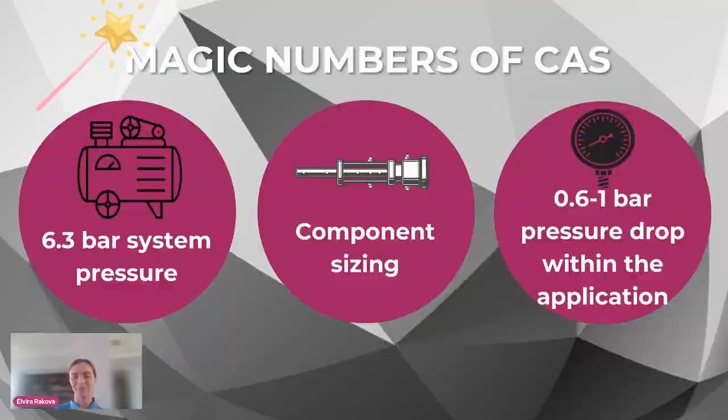Just to refresh a little bit the basics of compressed air: when we talk about, for example, 6 bar of compressed air, it means we take one volume of 1 cubic meter and put there 6 times, 6 cubic meters. So this is 6 bar compressed air. We always work there with volumes and with pressure. Why does this magic number matter? Why does this 6 bar matter? Why does the sizing of components matter, or the pressure drop?

Because this actually creates the part of the energy consumption, your energy bill that you pay, and also the system performance. Our energy consumption depends on the pressure level that we supply to the system, plus the pressure drops that occur in the system, even if we have a perfect system, times the filling volume. Filling volume is all the volumes that we need to fill: the geometry of the cylinder, for example, all the dead volumes we have, the flow in the application where we need the flows, all the tubing, and so on. So this is basically our system performance. We always work with pressure and with filling volumes.

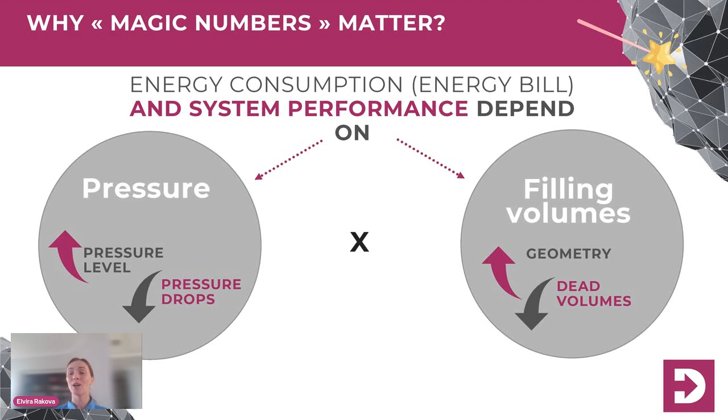Since we don't work with temperatures there and we have a standard temperature, we likely ignore this factor in our energy consumption consideration. However, it has some impact, but not a big one.

So the first magic number I would like to discuss and unveil today is the pressure level of the system, 6.3 bar. I put a magic ball here for a reason, because I always asked myself why it is 6.3 bar. While working in the lab, every time I turned the pressure regulator to 6.3 bar, I was waiting for something to happen. It's everywhere, written 6.3 - not 6, not 7, not 6.5. There is something mysterious in 6.3 bar.

So how did I start my journey to look for the technical explanation? First, I did a questionnaire of maintenance managers and also suppliers of equipment, suppliers of compressors, and auditors, and everyone confirmed this is the best practice, this is our baseline, and this is the standard. Whenever a system worked under 7 or 8 bar, everyone would say we need to reduce it to 6.3 bar at the machine.

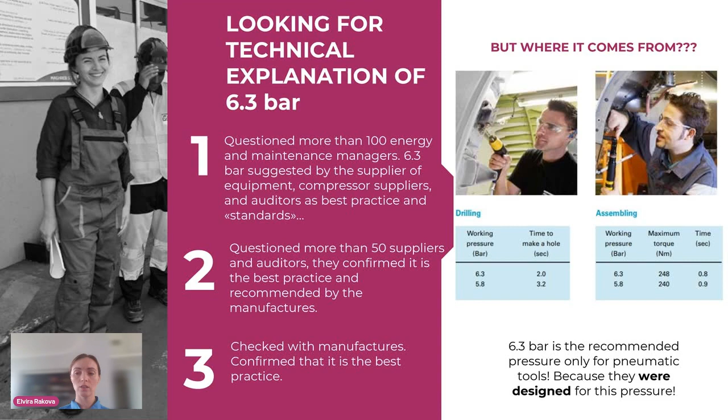So my next question was why those systems were actually designed for 6.3 bar. I'm waiting for the next slide to show you on the screen. Here it is, and here is another interesting historical background: 6.3 bar is 90 psi, because we use the SI system.

In the US, they would use 90 psi. 90 psi was chosen because it's a technically reasonable pressure that a compressor could supply, plus it's a pretty number - I've been told it's a pretty number. If you translate this pretty number into bars, it's 6.3 bar. This 6.3 bar was adopted in all countries, because this standard for those tools was first developed in the US, and then adopted elsewhere. I mean, agree, it's a nice number, right? Like 90, not too high, not too low - a very nice, pretty number.

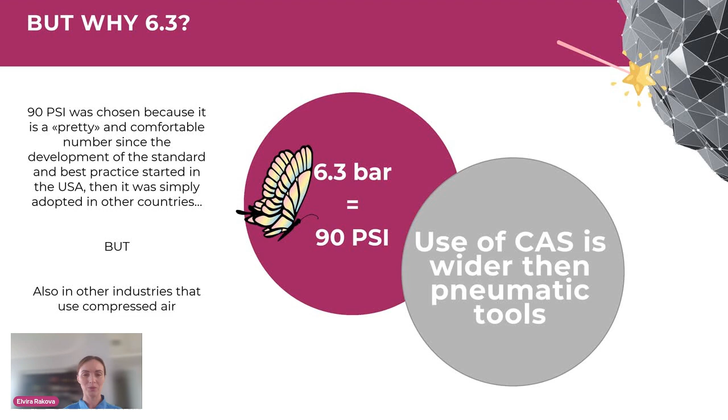So moreover, they were adopted not only in other countries, but also in other industries. It means that for pneumatic tools, only for a few applications, this pressure level and standard, and this technical explanation, was also adopted in other industries.

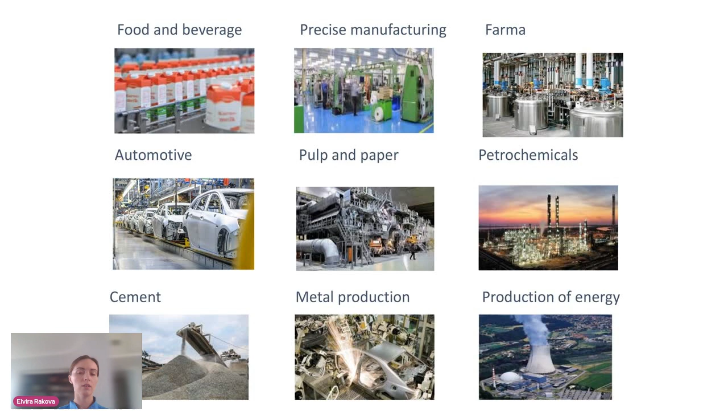But pneumatics, compressed air, is more than just drilling and checking machine tools. We use pneumatics in compressed air in food and beverage industry, precise manufacturing, pharmaceuticals, automotive, pulp and paper, petrochemicals, cement industry, metal production, production of energy. I don't have all the applications here, but you probably know better than me. We also have woodworking machines and various industries where we widely use compressed air, not only to drill holes with pneumatic tools. And these applications of compressed air can technically be divided into four types of application.

So the first type is, of course, the working air that we use in automation. For each application we have a certain equipment. So we have automation, we have painting applications for explosive areas. This is what we call the working air, and there we have certain tools, certain equipment and components. We also use it as active air for material transport and also for the bearings.

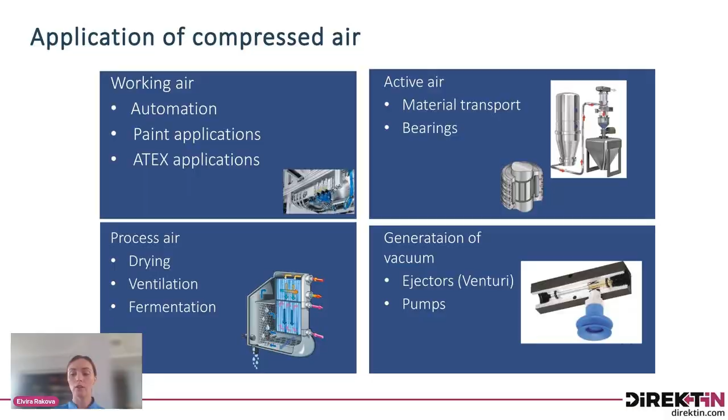In the process air, for example in cement, in the chemical industry, for drying, for ventilation, for fermentation, and we also use it in the vacuum. So we can use it as ejectors, or we can use it as vacuum pumps.

So here we are actually beyond those drilling and assembling requirements or standards that were developed and adopted so many years ago. And if we go a little bit backwards and question ourselves: do we actually need 6.3 bar at all for our application? Do we need this pressure level? Do we need pressure at all? Or maybe we need a high flow there? These are the questions I would like today to discuss with you.

And to show you that there are standard ways to optimize compressed air systems nowadays. However, we need to follow better practices, and we need to follow just a new thinking of the design of compressed air systems, as well as more efficient technology.

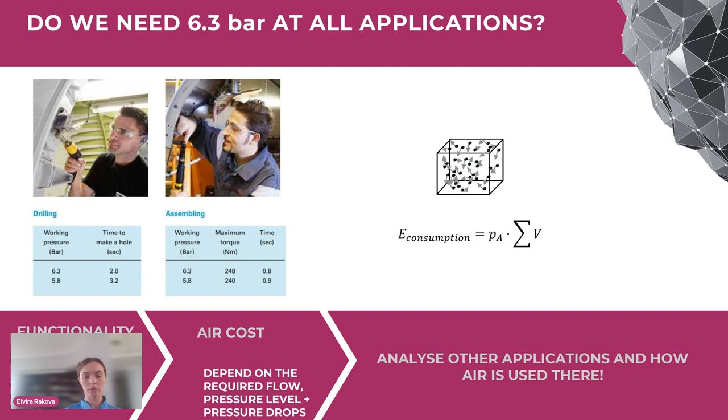So let's think together. We have the application of 6.3 bar for assembling, but what if we follow the same logic and go to all other applications that we have? And we see, do we actually need those pressure levels, or what do we actually need for our compressed air system there? So let's go ahead and see how air is used beyond those applications.

Today I would like to focus just on a few applications. So this is mostly used in the working air - basically the first type of application that I showed you, and also the vacuum. But today let's talk about the first step, the working air. In the working air, we have a few things.

So we need to perform transformation of pneumatic energy into mechanical energy of moving mass. So basically it's the cylinder. We have air somewhere, we push the piston, and then we have something moving, or we perform the force, or we use it in the press application. This is one of the most standard applications of compressed air, right? Standard pneumatics. How else can we use it?

We can use it for blowing. So basically we use this pneumatic energy as the kinetic energy of the flow for cleaning or blowing applications, for transport, a lot of things. Basically it's also used in chemical, in cement production, in various things. So there we need the flow. And another thing is that we use those pneumatic energies.

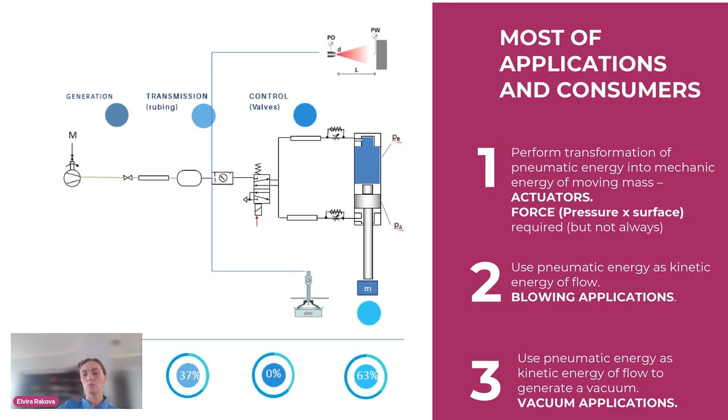So the question is, do we actually need technically those 6 bar at each consumer? Can we adapt it, and why does it matter? Now you see that there are practices that have been used in the past, and well, now we don't have to apply the same practices for those tools where a certain torque is required. Here we need a certain force. And this magic number, it also matters on all levels and on all applications.

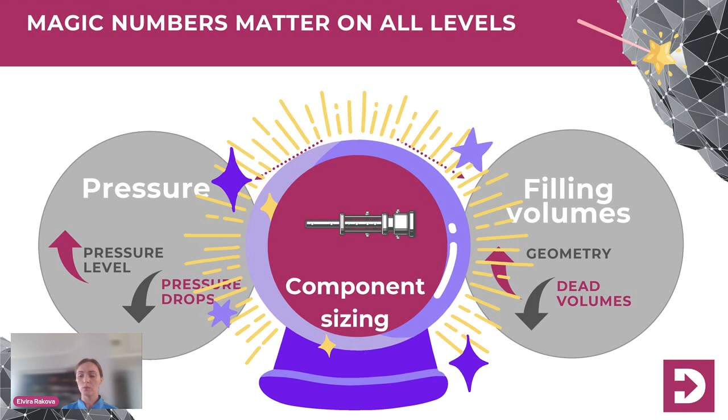First of all, of course, it's important if we see the pressure level contributes to energy consumption, as well as pressure drops, filling of the geometry and the dead volumes. It all comes to the fact that we need to size our components correctly. This, for example, we can see on the example of the cylinder. There are 3 steps for how to choose a cylinder, 3 standard steps. First of all, the choice of the cylinder starts with the identification of required task parameters, right? So we have the machine, for example a press machine.

We have a pneumatic press there. We need to understand the force that we require for this application, the velocity, and positioning. There are other dynamic factors, acceleration maybe. There are a few things that are important, but the most important is usually force and velocity.

Then we calculate the required cylinder diameter under standard system pressure. You see here on the right-hand side, this is the catalog of the manufacturer, and from every manufacturer you can find it, and it's standardized. You see this pressure for determining piston force, 6.3 bar. So it means it was calculated and tested by the manufacturer at this pressure. This is again our magic number here.

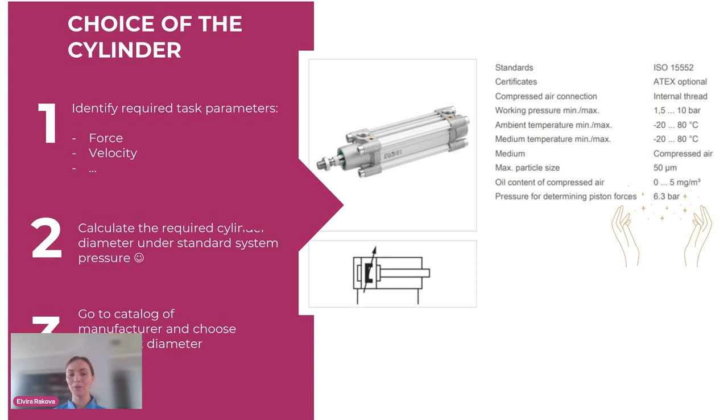Then we need to go to the catalog of the supplier. For example, if we chose to calculate a cylinder diameter of 26 millimeters that would be required for this task, then we need to choose cylinder 32 from our standard catalog. And since we assume right now that we cannot reduce this pressure, the pressure is set standard because the supplier told us this calculation was done under 6.3 bar, we cannot choose cylinder only under these circumstances, under these conditions.

Let's see what about the consumption, how the consumption will change there. First of all, here is the comparison of cylinders with diameter 50 millimeters, 32, and 25 millimeters. If we follow a very simple calculation of pressure and volume, you can see that the cylinder with a diameter of 32 millimeters consumes only 41% of a cylinder of 50 millimeters.

And this is a very common case in standard pneumatics. The common case, of course not the consumption itself, but in standard pneumatics it's very common when we oversize a cylinder. So for example, we chose the 32, but then, okay, maybe we need more safety there, and bigger is safer, probably, or faster. But this just gives the feeling that it can save the application.

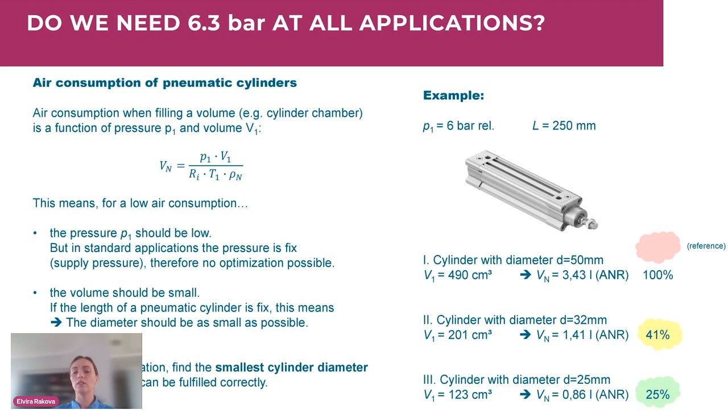You understand the logic. We're increasing volume here, and we cannot decrease the pressure level here, because this is the standard thing. It has always been done like this, and this practice of pressure level was adopted. So it means that to reduce energy consumption, we need to size these cylinders correctly, we need to calculate properly, not oversize it, and we always need to pay attention to this.

I want to show you now the standard cylinder sizing and this sizing dilemma, basically. You see here the numbers that are standardized nowadays. We have here, I didn't show the smaller ones, but we have from 32 to 125, and then we have a certain gap: 40, 50, 63, 80, 100, 125.

Each of these, the piston force and the 6.3 bar, contributes to or creates the extracting force. So we have retracting and extracting force, and this is usually the criteria how the machine designer, machine builder, or system supplier chooses the cylinder. As I said before, I calculated 49, I choose 50, okay? But look at this gap between the force values, the gap is actually huge.

So between 50 and 63 millimeters, it's 1,200 Newton. The next one is 1,900. The next one is 3,000. And another one is already 5,000. Another one is already 8,000.

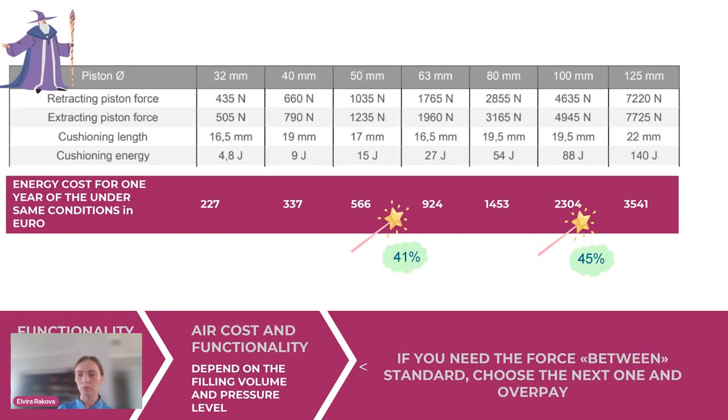And the problem is that standard pneumatics was actually not designed to be efficient, because this gap doesn't make sense, it doesn't make any technical sense. It should be the opposite: it should be a bigger gap in the smaller diameters and a smaller gap in the bigger diameters. But where are those numbers coming from?

In the 1800s, the French engineer Charles Renard created the Renard number system. This is the geometric progression that was adopted by the International Standardization Organization for various industries, including pneumatics. You can find it in electronics, in chemistry, in many industries.

It's a very good initiative, right? Because we need to have standardized sizing. We have to have standards to be able to communicate information to customers, to be able to optimize. I mean, it is essential and very important.

However, it was also applied for the cylinder bore size. And if you just multiply the current bore size by 1.259, you get the next cylinder size. So good news, you don't have to remember this anymore. What is the standard cylinder size? You simply just multiply it.

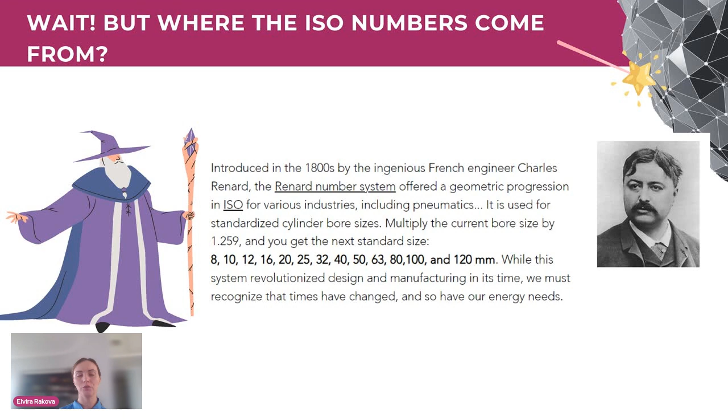But the system was adopted in the 19th century. And of course, it helped and revolutionized the design and manufacturing of that time. However, I think nowadays, for the 21st century and for 2023, it's a little bit old, and we are under pressure of energy efficient solutions. The question is how we can provide energy efficient solutions when we still use this. We have this standard of the standard cylinders, and we cannot change it because it's already best practice.

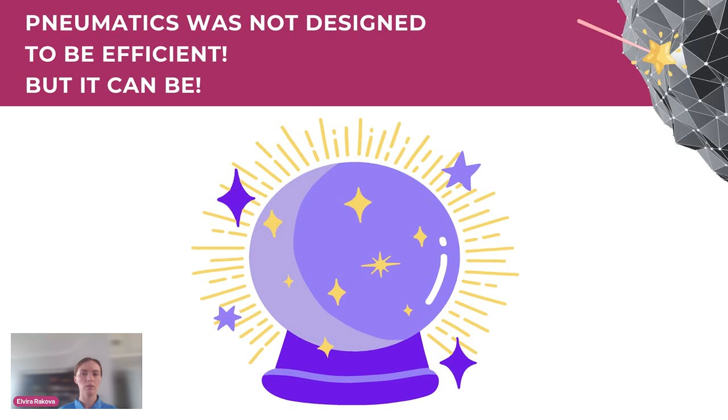And I think that pneumatic systems can be efficient, and I'm sure about this. It's not only my opinion, but the opinion of various manufacturers, system suppliers, and also machine builders, that nowadays there are slowly coming to market best practices for optimizing and reducing the consumption of the application. So once again, I remind you, and I will always remind you, we have pressure and filling volumes.

So we can reduce pressure level. Yes, we can reduce pressure level at the compressor, and we can size the cylinder according to the pressure level that you have. It doesn't have to be 6.3 bar. As you could see, you could choose a bigger cylinder under the lower pressure level.

You can also reduce the pressure drops. It doesn't have to be half a bar or 1 bar - that's too much. And if you hear from manufacturers that pressure fluctuation of 1 bar is fine, that's not right. Physically you always have pressure drops, but not as high as this one.

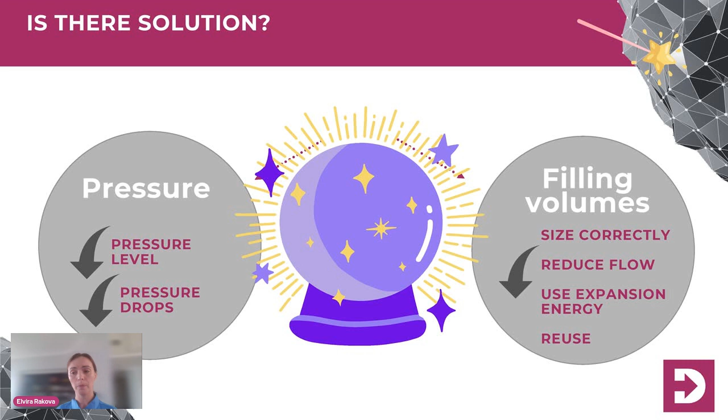And of course, the filling volumes - so you can use them correctly. You can size it correctly. You can reduce the flow. You can reduce, for example, also the dead volumes. So when we always play with these two things, we always need to find a balance for our functionality, for our application, and the pressure level, and also the flow.

And here, just one of the things that was developed by the Artema organization - I'm using a table from them about various energy saving measures at the levels of actuators, distribution valves, distribution lines, and also filter regulators. On purpose here, as you see, I don't touch the compressor because we're not talking about generation. We're talking about how the air is used.

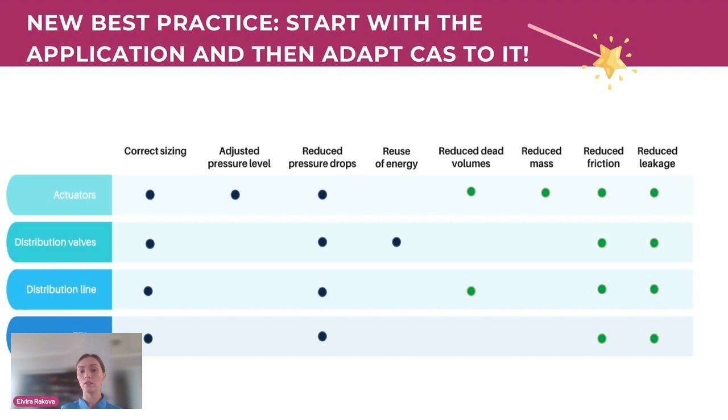My main idea is to show that first we need to start from the application. So we need to reduce the consumption of the application and ask ourselves why I have this pressure level. Do I need this pressure level here? Do I need this cylinder actuator? Do I actually need this technology? Maybe it's not a pneumatic cylinder that has to be used there, but maybe it's an electric actuator. There are various factors that have to be considered.

Today, I wouldn't like to go into the details about cylinder sizing, but you can find those tutorials on our YouTube channel, No Boring Pneumatics. So I hope you can have some interesting insights there and learn more about new technologies that are already available on the market.

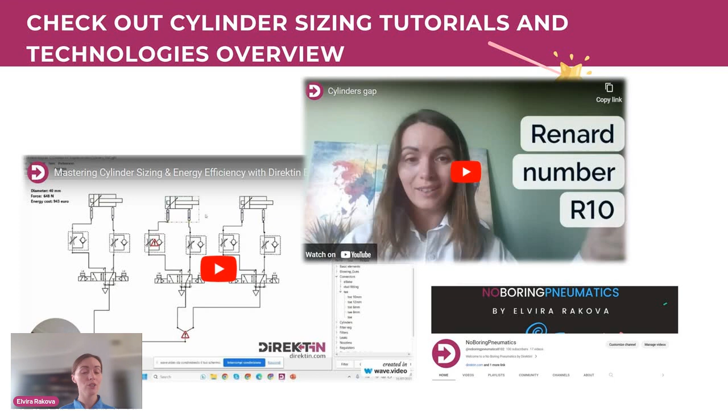And what I wanted to tell you is that there are various technologies that provide, for example, the cutting of the volume, the use of expansion energy of compressed air inside the cylinder. It can also reuse the energy. It can also reduce the pressure for the return stroke. So it's not only this old sizing with the Renard number available nowadays on the market. There are various technologies that can be implemented nowadays, and they work totally fine.

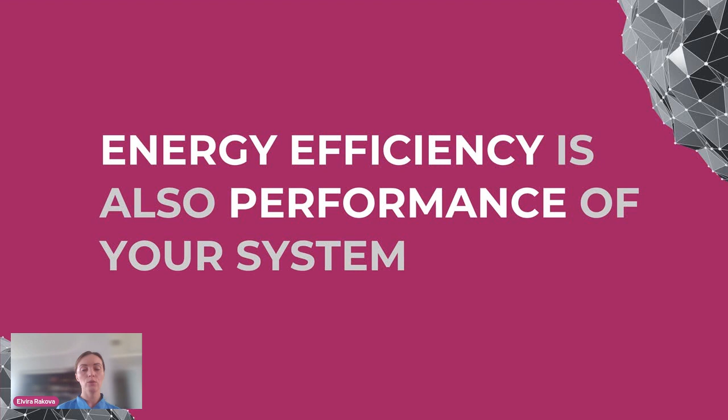Another thing that is very important is that energy efficiency is also performance of your system. What does that mean? It doesn't mean it's always a balance, where either my system is faster and better or more energy efficient, or it consumes more or less but loses performance. In pneumatics, it doesn't work like this.

Energy efficiency in pneumatics, in compressed air, is always the result of a correctly sized system. It's very simple: if your system is sized correctly, if there are no problems in the application - you have enough force in the cylinder, enough blow force, enough speed, and no leak problems inside the cylinder seal - I'm going into details now, but this is important to remember. It is always the result.

Another thing I want to talk about, the third magic number, is the pressure drop within the application. It's considered that 1 bar pressure fluctuation is fine. In my opinion we need to reconsider this - and also in the opinion of physics, thermodynamics, and real best practice in the industrial sector, it's a very high pressure drop within the application, within the machine. I'd like to share a real use case to show how optimizing the application first is very important.

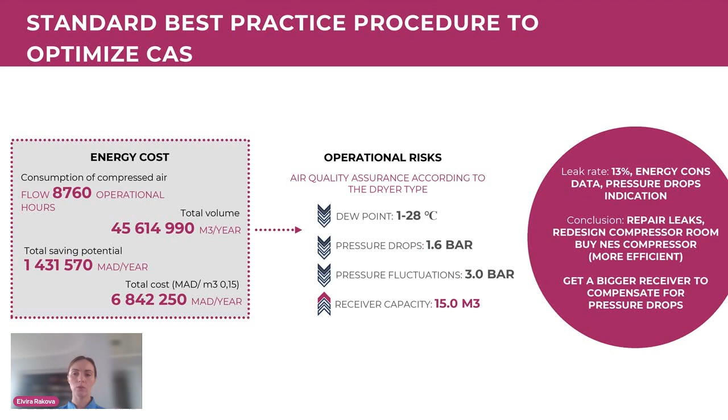And there were some leaks and so on. Of course, when we look only in the closed box of the compressed air system without the application, we reach one conclusion: we need to repair leaks, redesign the compressor room, buy a more efficient compressor, maybe compensate those pressure drops - or rather not have them at all - maybe we need a big receiver.

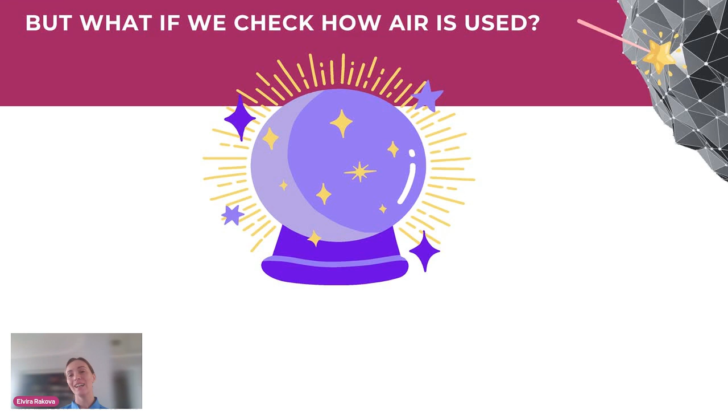So that's the information we got from the previous audit. Because I think compressed air is fascinating and very interesting, I'll use my magic tricks today in the slides - we asked our magic ball about the application. So what is the application, how is air actually used, and what are the magic numbers of this application - why does it cause such a high pressure drop, and what is this?

In this factory, the client replaced old technology with air knives - basically using a flow application. Before, I showed you we can have cylinders, vacuum, or flow applications. In this case, it was a flow application to clean the surface.

So we modeled the projected application - just the application, because they changed it. The most important thing for the customer was the blow-in force and the consumption, the flow rate in cubic meters per hour. So these were the requirements, how the air was used: it had to provide a blow-in force of 120 Newton with 700 cubic meters per hour.

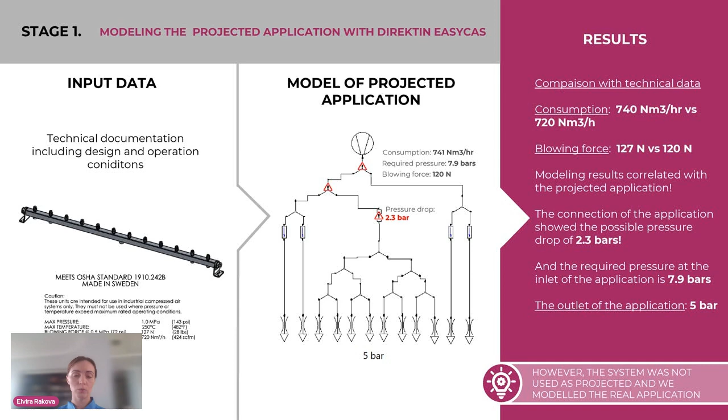So we saw our model correlated with the technical standards, though there were some little flaws in this application because one piece was changed, another wasn't, and so on. There was a pressure drop within the application, a pressure fluctuation of 2.3 bar. Of course, this was not normal, and the customer was not satisfied. If we calculate back, the required pressure of the compressor was not the magic number of 7 bar.

However, the system didn't actually work with this blowing force and this pressure, because we saw on the manometer the flow was very low - sometimes okay, sometimes not. So we saw this wasn't the real application. When we calculated and modeled the real application, we saw that the required outlet pressure was 2.2 bar, and the actual blowing force during operation was 70 Newton instead of the projected value. The consumption, of course, was lower.

And the required pressure was 3 bar with a drop of 0.8 bar.

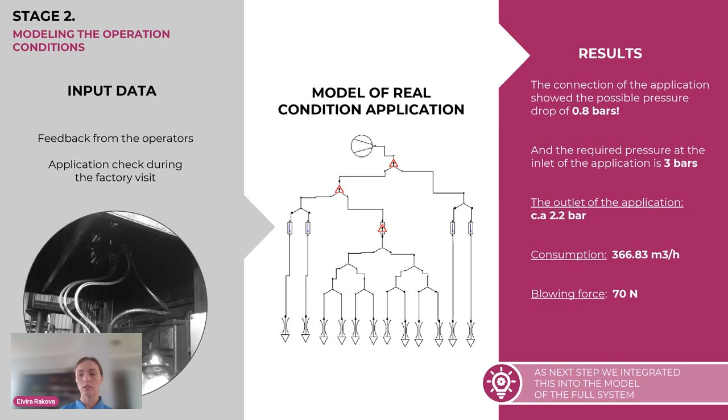The next step is to take this application. After understanding what the application does and what the process actually requires, we always need to take the full holistic picture and insert this application into the compressed air system, understanding how everything works together, how everything correlates.

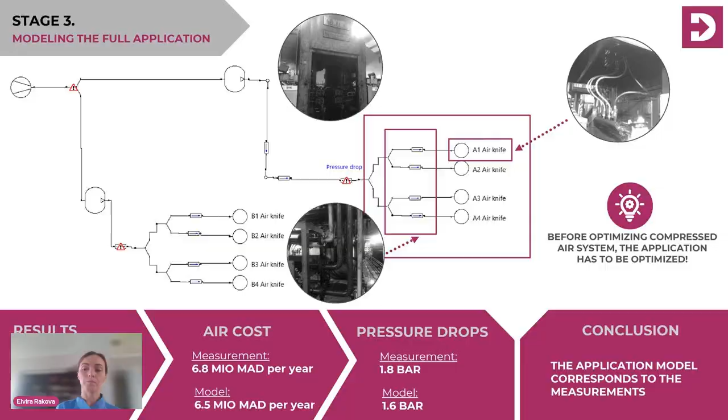So the results were following. It's true, the measurement confirmed that this was the situation on those air knives: the pressure was low and the flow rate was also lower than projected. The air cost more or less the same, and the pressure drop was around 1.6 to 1.8 bar. So the application model corresponded, but of course...

customer wanted to have a more efficient component, more efficient application with a higher blowing force and also better performance of the system. And here comes the question: was the compressed air system actually ready for this integration?

Because in our head, we have the machine and we have the pipe, and somewhere we have the compressor, maybe 2 kilometers away or 1 kilometer away from this room. And it looks like a very simple system that should work and adapt to this application. However, it's not like this. It's a very complex system with various components, with various things that should be considered.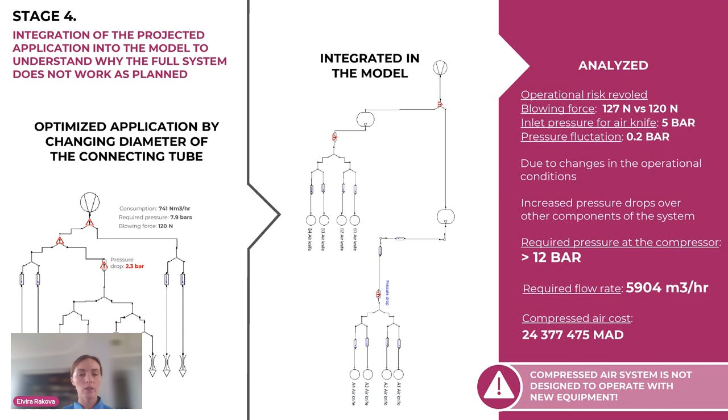So if we take the projected application that the customer wanted at the beginning with the high blowing force, versus the optimized application with the pressure fluctuation - when we optimized the application, pressure fluctuation was 0.2 bar, that is normal, not 0.6 bar. The problem is that if we actually wanted this output, we had to have a huge compressor with a pressure higher than 12 bar and a very high required flow rate. The conclusion was that the system was simply not designed for this.

It was not designed for this because this new efficient component that consumes less and gives more required a higher mass flow rate, and this was causing a higher pressure drop in the full system. Going back to the logic of changing something in our system, integrating new efficient applications is always a good idea.

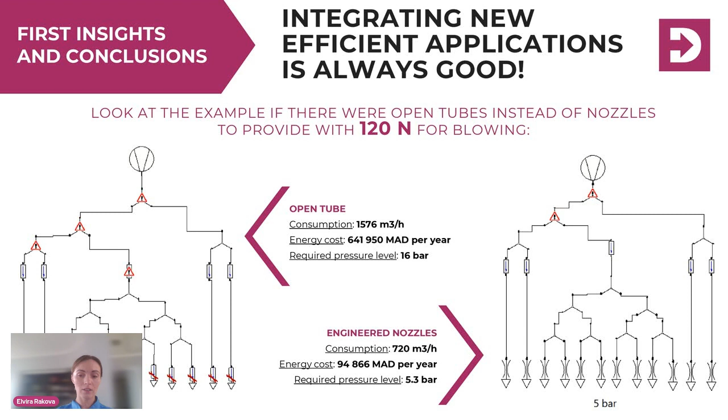In this case, the open piping was replaced by nozzles. It's good engineering, great nozzles that should work and have better performance. However, the system that already existed before was not able to operate with these conditions. So system compatibility has to be checked always first.

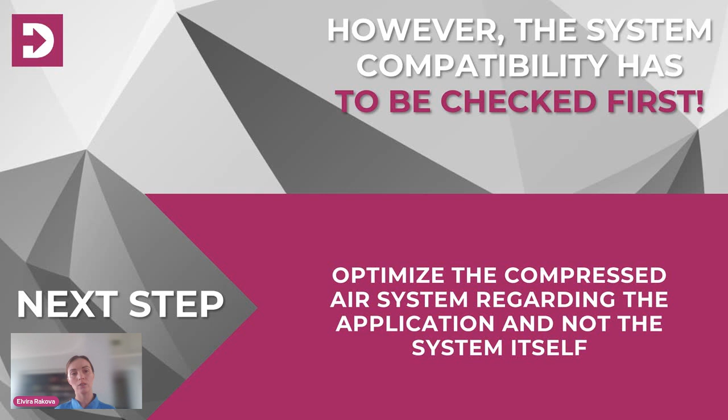So optimize the compressed air system - and what I'm always telling people, we need to optimize the compressed air system regarding the application, not the system itself. We don't fix the compressed air system for its own sake, but of course we need to fix it - that's the next step. First we need to understand how it is used and optimize the application. We're not creating a compressed air system for the sake of the compressed air system.

We're creating it to be able to perform something, to operate - to have the forces at the end, to have certain flows at the end for our application. We don't buy air, we buy the application. And this is very important.

I will not bother you with the numbers, just to tell you there are various options to do this. For example, in this case, we can keep the same functionality the customer wanted with reduced pressure fluctuation, requiring a pressure level - maybe it's a magic 6.2 bar, maybe it's really a magic number. In this project, this was suggested, but the air costs were higher than before.

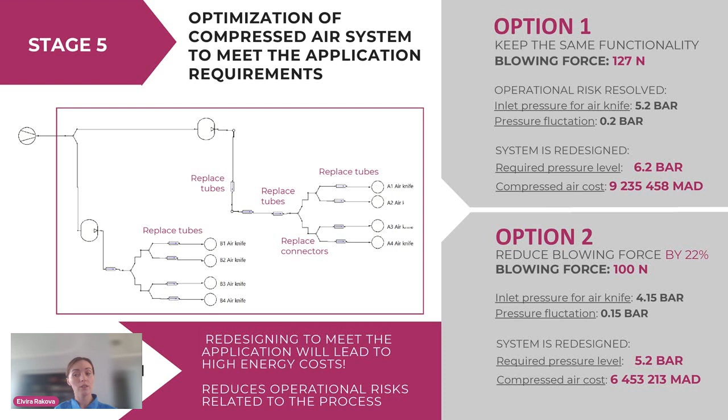In the second option, maybe we can reduce the functionality a little bit, since you saw the cylinders are oversized - sometimes we have 3,000 Newton where we don't need it. So sometimes we should question the supplier of the machine: do we need this force, do we need this flow here at all, in order to adapt our compressed air system? For example, if we reduce blowing force by 22%, we needed lower pressure for the air knife, and the system redesign was now 5.2 bar, with lower compressed air costs.

And here now it's another tricky question. You see, we always need to dive deeper into the application and be annoying and understand why it is so, why I need this force.

Because, for example, from our experience, the application could be adjusted for low pressure or for blowing force or for a higher flow rate. So here is the tricky thing. We have various applications for compressed air, and there are two different applications for the blowing: for cleaning, we need high flow but low pressure to blow large surfaces, and for precise cleaning, we need high blowing force, high pressure, and low flow.

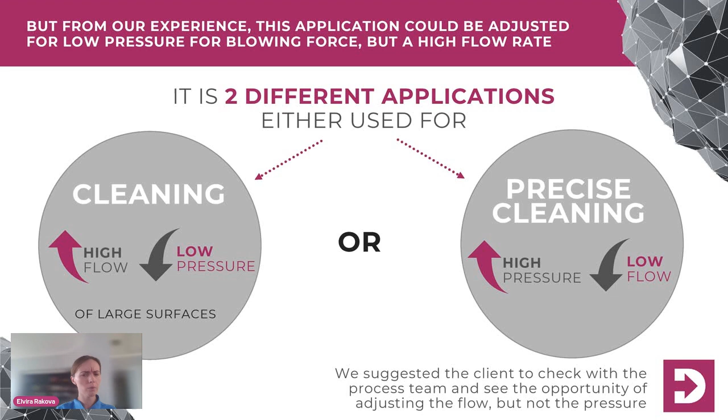Most of the time it's a tricky thing to comprehend in one, because we have certain ways of applying compressed air. We have a compressor at 7 bar, 6.3 bar, and it just serves all the applications. But if we go a little deeper and understand this, sometimes maybe we don't even need it, because our application is different, our requirements are different, or the process team doesn't need this.

So it's always very important to understand first how air is used. And maybe sometimes we don't even need compressed air. There are various things. We always need to understand the life cycle cost analysis, the energy cost, and how our process will change. Option 3, for example, was: okay, let's leave it the way it is.

We need to change something there, of course. Behind these options, there are modifications of the system, right? We leave this blowing force like this, and we leave the energy cost very low now. But option number 4 is a philosophical question, a technical question: do we need this at all?

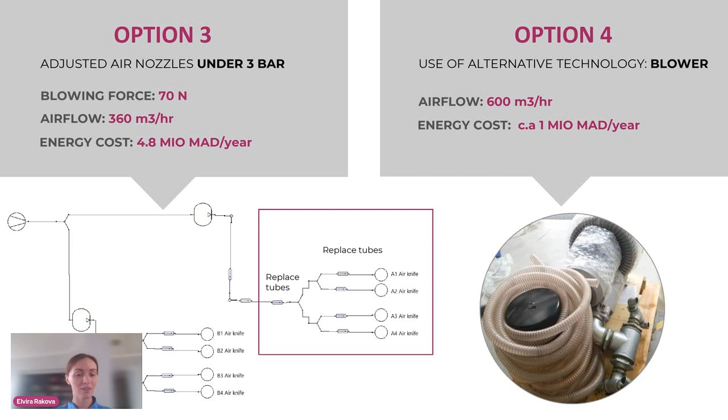Maybe we can use an alternative technology, like putting a small blower that provides the flow here. It doesn't create any force. It creates 2.5 bar of pressure, right? We don't need any compressor there. So we remove the compressed air system entirely and just put a small blower that works only for this application. Those kinds of questions, we don't say something is right or wrong.

We cannot say right away, remove all compressed air and put electric drives, because it doesn't work like this. There are so many applications where pneumatics is way better than electrics, and applications where electrics is better than pneumatics. Better, not that it's shinier and fancier. Better is because we took the application, we considered the functionality, the dynamic functional characteristic, as already said.

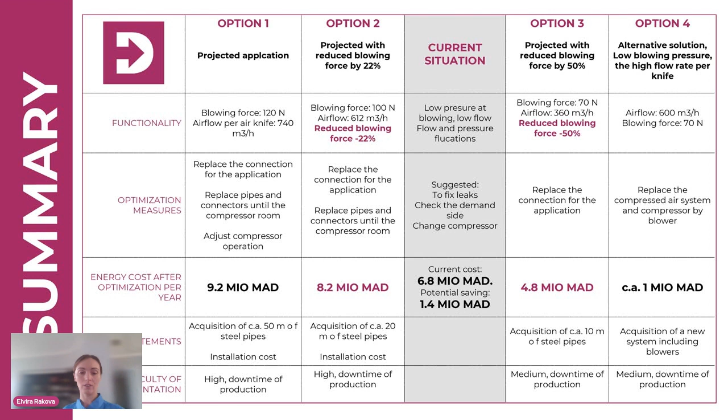Energy cost, we consider the full life cycle cost with maintenance, with investment. We saw the amortization curve, and only after that can we make a decision on which application to use. Then, when we have several options, we understand that we can choose the most optimal application for this, and not the one that shines in the catalog.

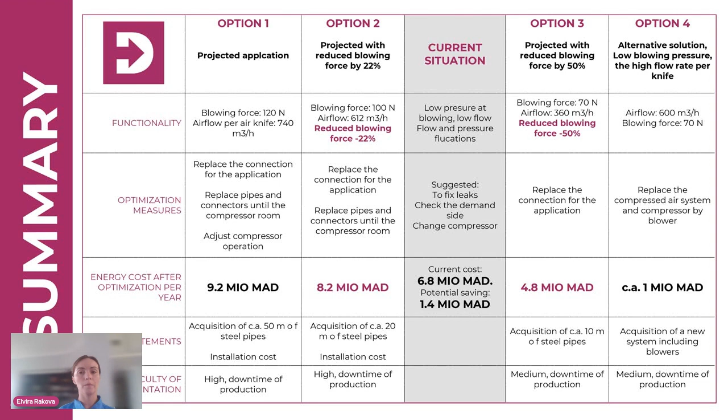Like, for example, here you see there are 4 options, and we first ask about functionality, and after the functionality, we go back and adapt the compressed air system. So we don't design the compressed air system first and then put applications inside it that use it. We design the application first and then adapt the system. Maybe it's 2 compressors, maybe 3, maybe 1 compressor with 1 booster. Who knows? We always need to understand what our requirement is.

So questioning back the design, as I said: design or check your application first. Your system doesn't have to work at 6.3 bar, unless it's tools. Component sizing doesn't have to be the standard ISO components, or maybe it is. It doesn't have to be the pressure level of 6 bar for those components, or maybe it is. It can be other efficient technology there, right? The market is now full of various efficient technologies.

Or maybe you just adjust the pressure reducer for the return stroke of the cylinder. And your pressure drop doesn't have to be 1 bar. This is within the application. It can be 1 bar if you have a big system up until the compressor, but it doesn't have to be that way.

There are physical conditions, physical calculations based on standards, based on tests, that help you calculate the pressure drop that should theoretically be in your system. Plus, of course, we have some safety factors and so on, but 0.2, 0.3 bar is a normal pressure drop with the pneumatic system, not 1 bar, not a fluctuation of half a bar. Then, when you choose your application, adjust your compressed air system to it.

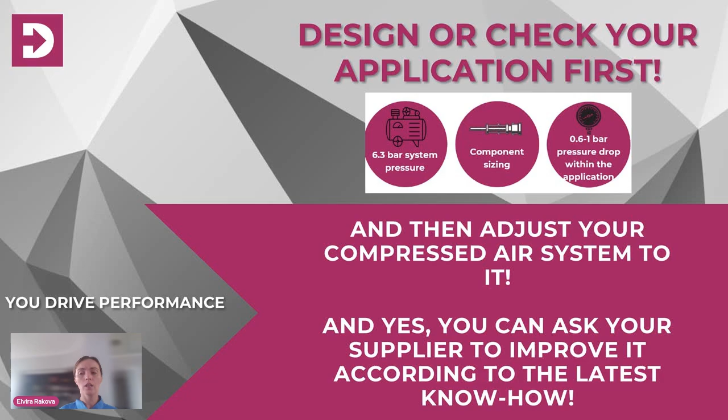If there are energy managers or end users watching this, you drive the performance. You can go to your manufacturer and say, I want to optimize it, reduce the pressure level because it's too high, or use a multi-level system pressure. Reduce the pressure drops for me. Show me what other efficient components you put here. Are you sure you didn't oversize those cylinders? These are things that come from energy managers and maintenance managers.

So you see the state of the art, how pneumatics is designed - it's not designed to be efficient. And I showed you today only two minutes about the magic numbers that we think are best practice.

One of the real magic numbers that makes technical and physical sense is the critical pressure ratio at the ideal nozzle, that is 0.528. That's it. Then we have the Reynolds number, and other numbers, but they are proven in the laboratory. It's not just that someone said it's a beautiful number, and now everyone uses it for all applications.

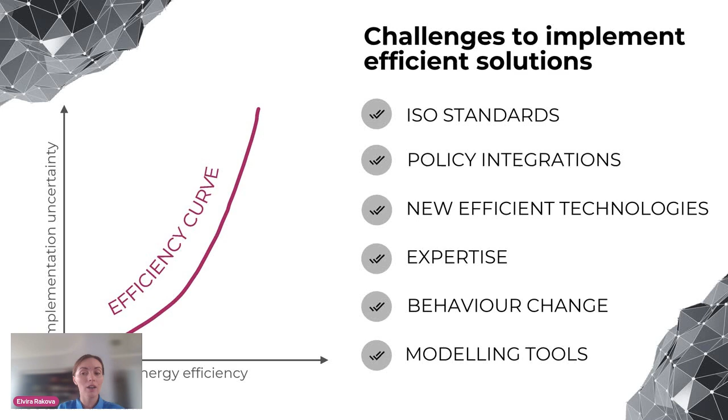And we have experts, we have expertise. We need some behavioral change, like being a little more open-minded about different applications and having this information. And we need the modeling tools.

And today, I would like to invite you to the AirG movement. So what is this? AirG movement is a very new thing. We're launching it in October, and you can sign in to this. It is a platform - AirG comes from Air and Energy. We will have there collaborative software for efficient design of compressed air systems. It's free of charge - you can already download it and use it. It's powered by Decoding, where we developed it. But we realized that we need more personal touch there. We need people, and I meet so many brilliant experts with amazing technologies.

People write me saying, look, I developed this thing and it saves 70%. What we want to do is have a common space, not only for suppliers of efficient components and experts, but also end users. Because when we talk to end users, someone asks, okay, we need to optimize this, but can you also monitor it, or do leak detection, or something else? So there's a need not only on the informative and educational side, but also on the collaboration side. We'd like to invite all the experts and also people who use compressed air, or are just curious about it, or maybe know some other magic numbers.